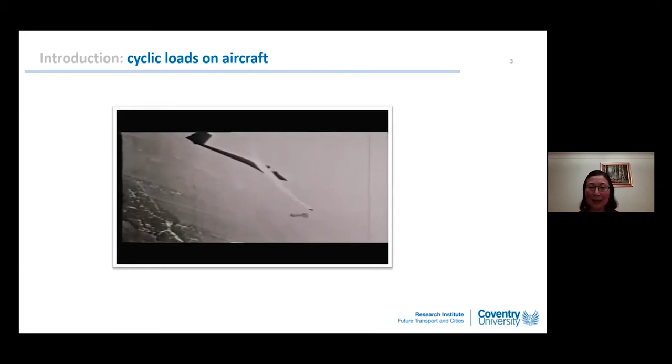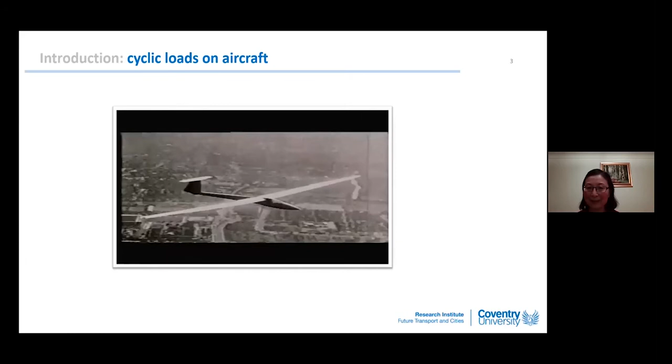First I want to show you a glider, which gives a graphic presentation of cyclic loads. I can't show this on large aircraft because they wouldn't have this kind of cyclic loading graphically. All I want to say is aircraft loads are cyclic, fluctuating.

In the air we have atmospheric turbulence load, with a frequency of about 0.5 to 1 Hertz cyclic loading. On the ground, we have taxi load before takeoff and after landing, which is also quite severe on the wing. In the fuselage, the cabin pressure load is 1 cycle per flight, but that is quite high because of the pressurization in the sky.

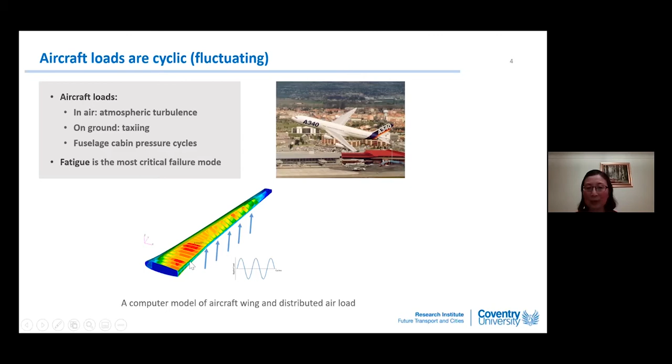Fatigue has been the most critical failure mode for airframes. The lower picture shows a wing model we did in finite element analysis, showing the air loads and their cyclic nature, with the hot spots tending to be in the wing root, since the wing is like a cantilever beam.

Why does metal respond to cyclic loads? Because metals are crystalline in nature, with atoms arranged in an ordered manner. Most structural metal materials are polycrystalline, consisting of a large number of individual grains or crystals arranged in an ordered manner. Dislocation will happen even under static tension load, moving along the crystallographic planes and causing the onset of slip.

What I'm showing is a slip band within the grain. That sliding causes the grain to move relative to the neighboring grain. This is true for both static load and cyclic load, but under cyclic load, the slip band progressively moves in a forward and reverse manner. Eventually we get extrusion and intrusion pairs, resulting in the formation of fatigue cracks - this is the famous Wood's model.

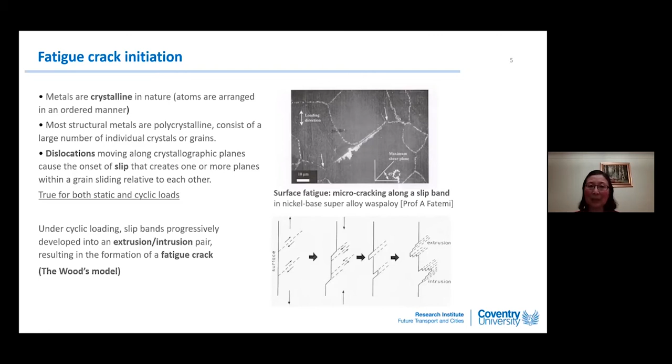So now we have cyclic loading and crack initiation in metals explained. The definition of metal fatigue has an official one in the ASTM standard, but that's very long for professional fatigue research. I quite like this one from Open University lecture notes, which says fatigue failure is the formation and propagation of cracks due to repetitive or cyclic load.

The second line is quite important - it says most fatigue failures are caused by cyclic loads significantly below the loads that would result in yielding of the material. That means even when loads are much lower than the yield strength, if applied cyclically, fatigue will happen.

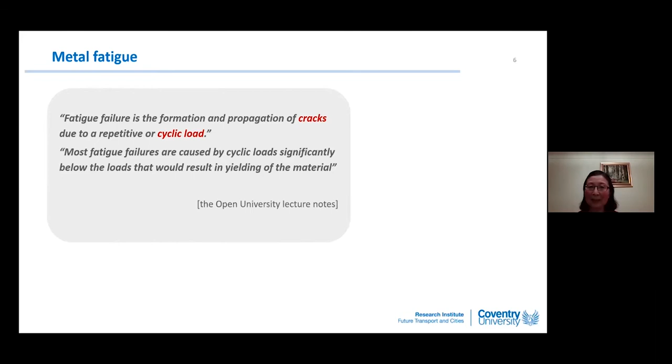The first person to study fatigue was Mr. Wohler in the 1850s - that's 170 years ago. He studied progressive failure in German railway axles and structures, and he invented the first fatigue test machine, shown here as a rotating bending machine. We have one in the faculty, but much more modern now.

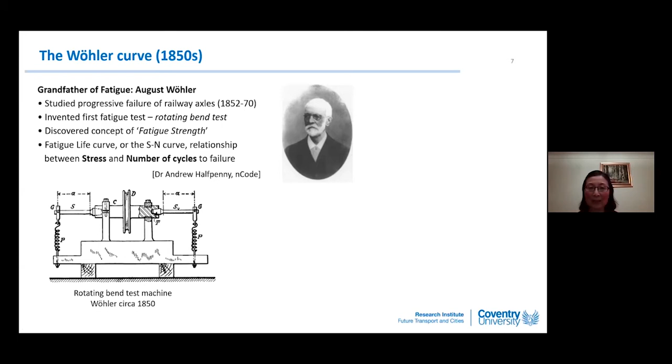Basically this axis bar was attached by two springs on the substrate base, applying bending moment, but the axis also rotates, so the bending moment introduced tension and compressive stress applied cyclically as it rotates. Wohler discovered the concept of fatigue strength for the first time in the world - even when stress is much lower than yield strength, metal will fatigue under cyclic load. I just want to show the Wohler curve.

The Wohler curve shows applied stress versus number of cycles to failure. These points were Wohler's original testing points, and you can see that as stress decreases, the fatigue life gets longer. That was his discovery, and he was the first person to correlate this relationship.

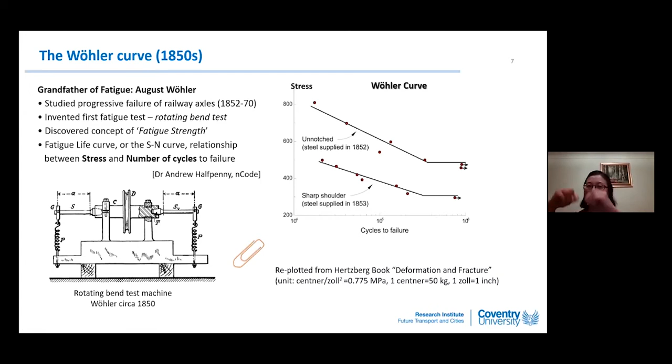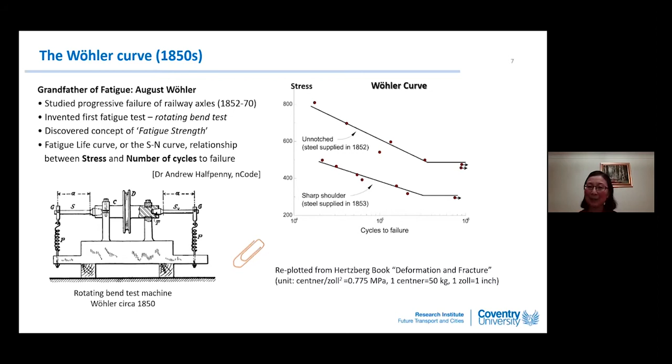So we don't have a fatigue machine, but I hope you have a paper clip, and you can actually extend this metal wire like this. I hope you can see. You can do the cyclic bending test in my class, and hopefully just before I finish the lecture, your metal wire will fail. If you only bend once, you would not fail statically because it's a ductile material.

But if you do it cyclically during my class, it will fail by fatigue. So the modern treatment of the Wohler curve, we call it the SN curve, where S stands for stress applied and N stands for number of cycles to failure. Some people still call it a Wohler curve.

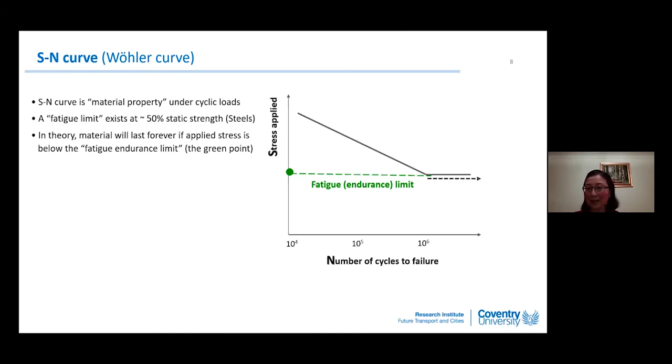That is true for steel alloys, for ferrous alloys. It really means if your applied stress is below the fatigue limit, there will be no fatigue - in theory your structure will last forever. However, lowering applied stress in engineering design often means an overly conservative design, and that leads to increased weight, increased fuel consumption, increased CO2, and increased cost of the parts.

Therefore, reducing stress is not always in the design envelope. The second thing I want to say is that in service, we don't really have a fatigue limit stress because service loads are variable - you could have bad weather, a big gust loading in the aircraft, or a heavy landing. So fatigue limit does not exist in real structures.

The final thing I would like to mention is stress raisers on a component - a large cutout, fastener holes, cracks, and joints with a geometry discontinuity. That is the one I would like to talk about today, stress raisers.

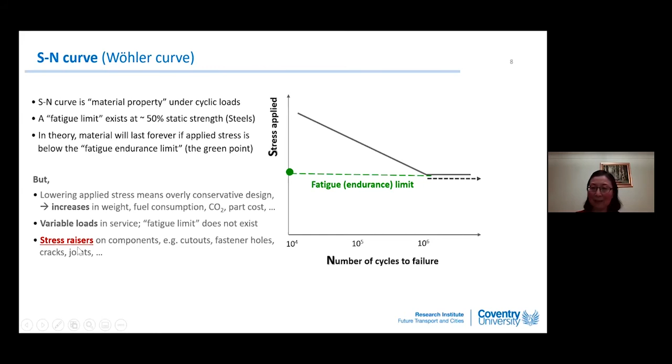The first example I want to discuss is the de Havilland Comet aircraft in 1952, which was the first jet passenger aircraft with a pressurized fuselage. It was very comfortable for people to travel with a pressurized fuselage and large square windows. But that was a mistake in design.

Two aircraft fell apart during mid-flight in 1954, and the reason was metal fatigue. The middle picture shows a section of the upper fuselage showing the fatigue crack around the corner of a square window. The crack propagated and eventually peeled the fuselage open, causing the aircraft's disintegration.

A finite element model shows a square window is a bad idea - you get stress concentration in the red hotspots at the four corners of the window. So when we fly these days, we notice our windows on aircraft are round or even oval-shaped, not square-shaped. This event changed the face of the commercial aircraft industry.

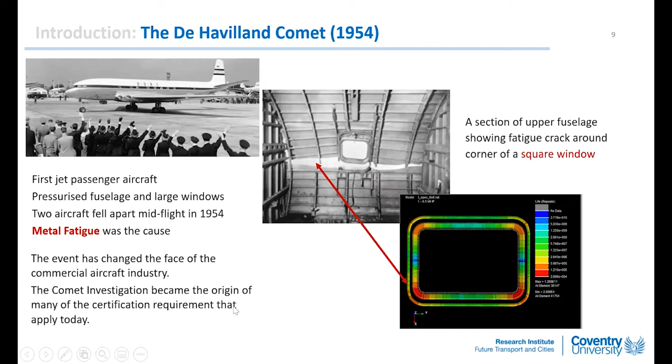Since the 1950s, the Comet investigation has become the origin of many certification requirements that still apply today. So after 34 years since the Comet accident, there was another accident with the operator Aloha, involving a Boeing 737 aircraft - 34 years after we designed against fatigue. But this time, the aircraft actually landed with one-third of the fuselage peeled open, killing one flight attendant.

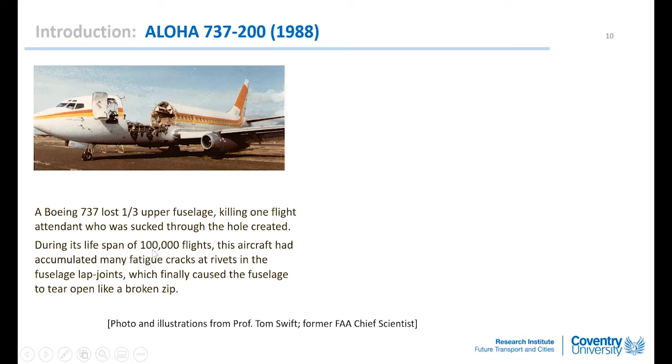The problem with this aircraft is the aging aircraft issue. Normally the aircraft design life is 40,000 flights, but this aircraft actually flew about 100,000 flights and had accumulated many, many small cracks.

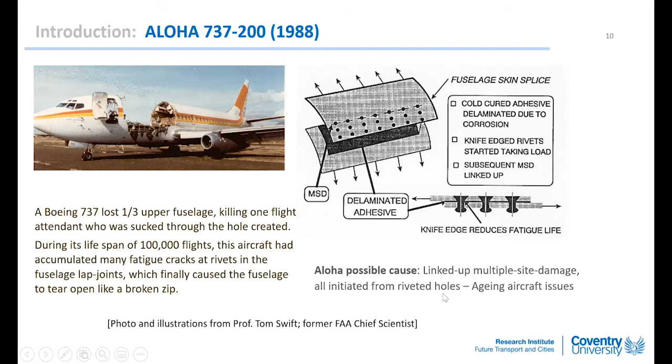The theory of the Aloha accident, from FAA chief scientist Professor Tom Swift's lecture, was the link-up of multiple site damage - an aging aircraft issue. So why do holes give us so much trouble? I want to explain this in part two of my lecture, on stress raisers.

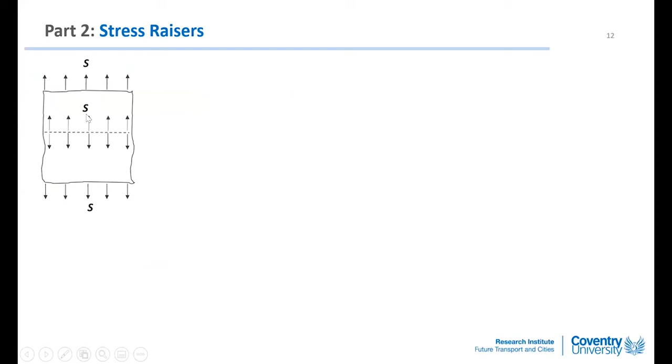If there's no stress raiser, no holes in the structure, whatever stress S you apply remotely, you get internally the same stress. As soon as you introduce an open hole, like a window cutout, the stress increases by 3 times. That's the classic solution, called a stress concentration factor, KT. By finite element or photoelasticity experimentation, the value for an open hole is about 3. So if you apply a stress of 100 megapascal, your local stress is 300 megapascal.

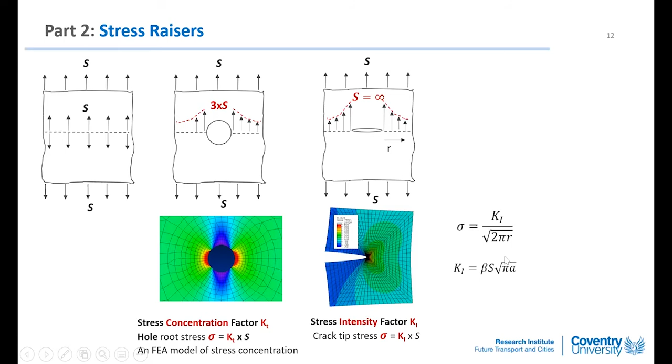But if we have cracks, for example if the aircraft has a scratch mark, a dent, or a sharp crack, the stress increase is even larger. That is solved by a fracture mechanics parameter called the stress intensity factor. That is not a stress concentration factor. It requires fracture mechanics equations, which I will return to later.

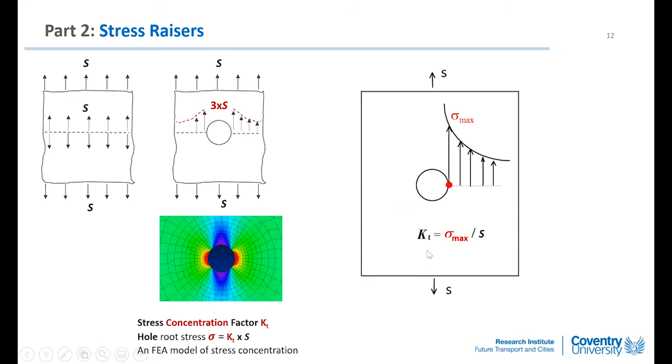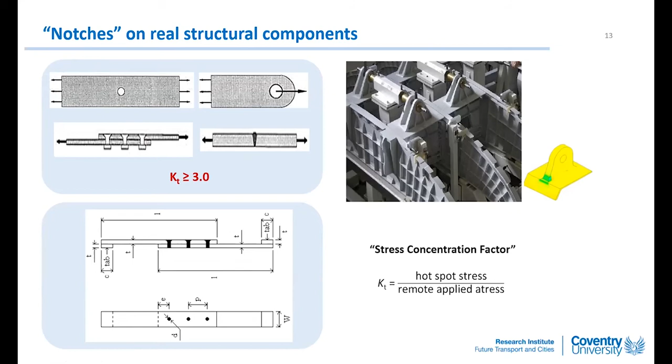For the moment I'll talk about holes. The hotspot stress, sigma max divided by applied stress, is the stress concentration factor. In my field we call this the notch effect. It doesn't matter whether it's an open hole, a pin-loaded hole, a riveted hole, or even a welded joint—we just call it notch effect. If you look in the dictionary, a notch is an indentation, a dent. So the notch does have an effect on structures because it creates a stress concentration.

Take an aircraft wing panel assembly. Traditionally these were made with thousands of titanium fasteners. This one was tested at Cranfield University with a simulated crack. Next time you're on a flight, look out the window at the wing and you'll see this pattern of riveted joints. This example is from an FAA lecture given at Cranfield 10 years ago, showing a real crack developed from fastener holes.

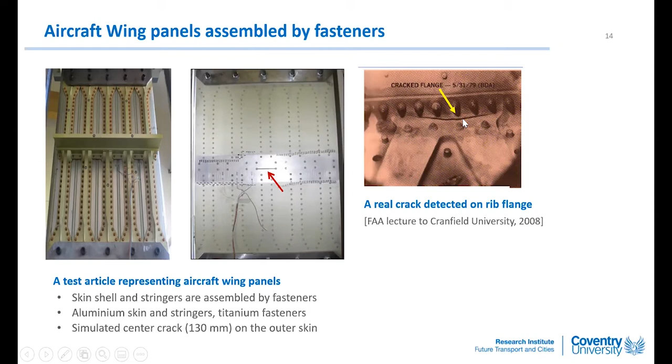So the notch effect on the S-N curve looks like this. Without any holes, your S-N curve is this black curve, tested using a smooth sample, like a dog bone or hourglass shape. The stress concentration factor is 1—there's no stress concentration, and this develops the material property. The S-N curve here is called a material property curve, with no geometric effect. As soon as you introduce a hole, you knock down the S-N curve by a factor of KT, the stress concentration factor.

So the S-N curve is much lower than the material curve. If you apply a stress shown by this dashed line on the material, you get a much longer life than you would get from the structure with the open hole—that's the orange line. So the stress riser actually reduces the material S-N curve by a factor of roughly KT.

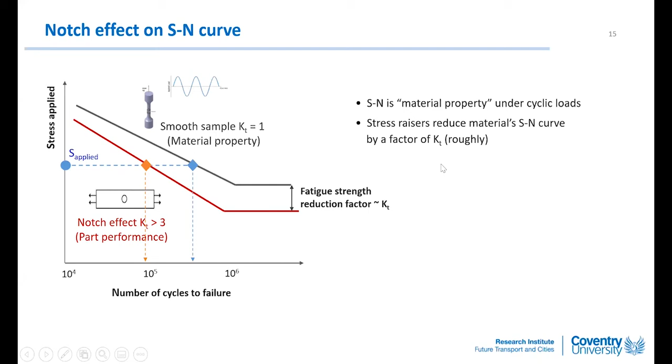After talking about holes, I want to cover one slide about cracks, since some of you will be dealing with crack growth, which requires fracture mechanics. There's another grandfather figure called Griffith, a British scientist working at the Royal Aircraft Establishment in the 1920s. His theory is based on the strain energy release rate. Griffith's theory says that if the strain energy release rate G, named after Griffith, is greater than the energy available to create a specific surface, then fracture will happen.

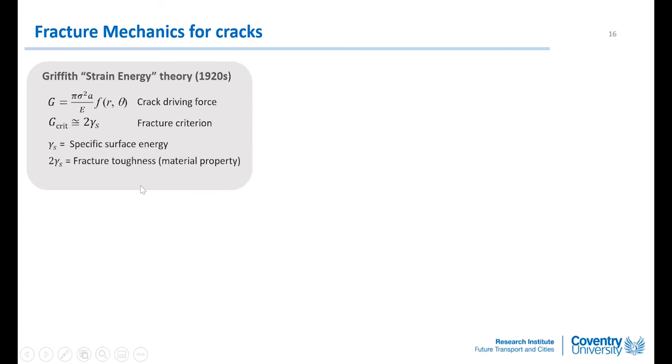In engineering there are three kinds of materials. First, brittle materials—very brittle—where the free surface energy is 2 times gamma S, which is the original Griffith theory. The easiest example of a brittle material is glass. If you have a scratch mark on glass, you can actually break it. No one wants to fly in a glass aircraft—it's very brittle and cannot tolerate even a tiny crack.

The middle category is ductile metal, like our aluminum, titanium, and steels. You get two beautiful plastic zones at the crack tip that absorb energy—this butterfly shape is the plasticity energy dissipation zone. This increases the fracture energy by a factor of gamma P, meaning plasticity, so the fracture toughness increases enormously. Ductile metal can tolerate crack growth.

The last material is laminated composites. You've got a 0-degree fiber layer, a 90-degree fiber next layer, and 45-degree fibers in further layers. In that case, it requires defining the fiber volume fraction and the matrix.

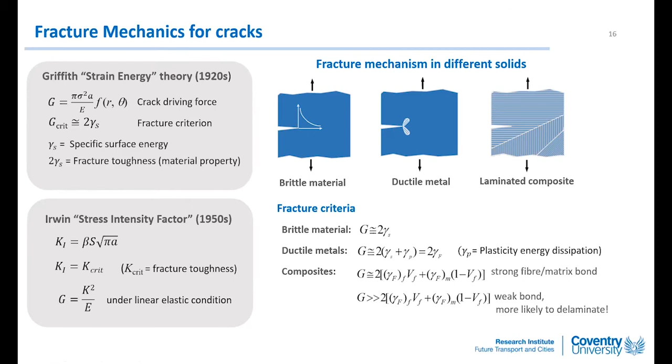So that concludes my part 2 about notches, round holes, and cracks. I just want to move to technologies development that can enhance our capability to design against fatigue. So I will talk about metallics first, and how we can reduce or even eliminate fasteners by advanced welding, integral machining, or large extrusions. The latest one is additive manufacturing, which can reduce part counts and cost.

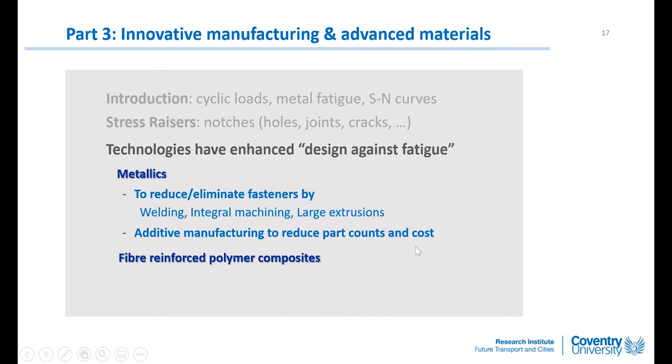So the metallic materials on this aircraft are dominated by aluminum alloys. 2000 series are very good for fatigue resistance, so they are used for making wings and fuselage shells. 7000 series are used for spar, stringers, and ribs because they are high strength and high stiffness.

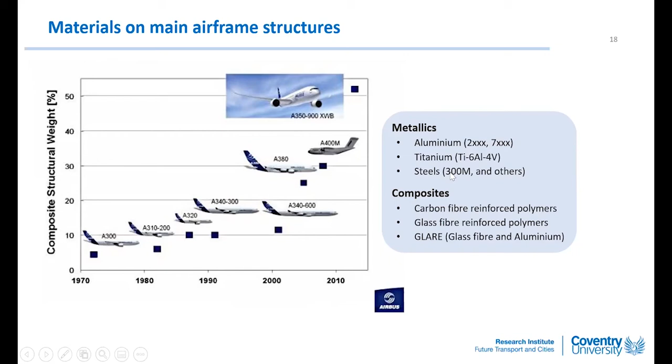We also have titanium alloys used for fittings and joints. Titanium alloy usage will increase as we introduce composites, because aluminum has a galvanic corrosion problem with carbon fiber. And finally, steels are very heavy and we are trying to avoid using steel, but this 300M steel is used on landing gear, and that carries the aircraft weight at landing. That is the highest strength steel currently we can have.

So talking about advanced welding for joining materials - about 20 years ago, in the millennium year, we had a project to replace these fasteners with a weld. This is a lap joint, so you have to use more material to make lap joints, and these fasteners currently are titanium fasteners, which are heavy. So the project was to use a butt weld here to join them, and that can save weight by about 0.8 kilograms per meter length of structure.

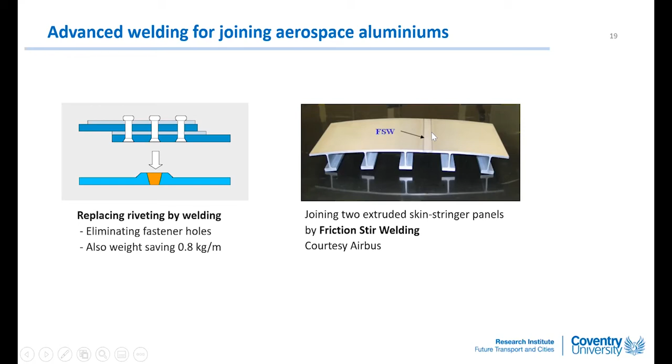The second example on the right is an Airbus project I worked on also about 15-20 years ago, to join two large extruded skin stringer panels. Each part has 3 stringers, joined by friction stir welding, which was invented by TWI in 1990 - that's 30 years ago - making it possible to join aerospace grade aluminum alloys.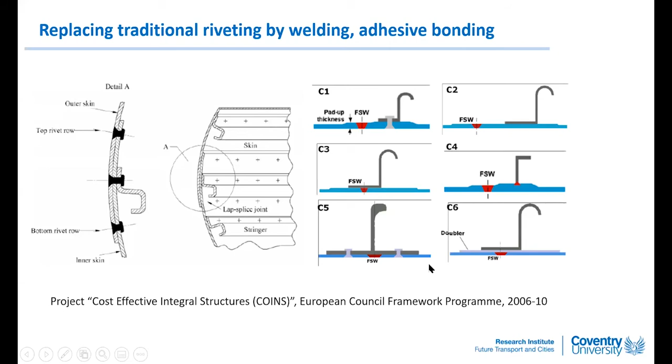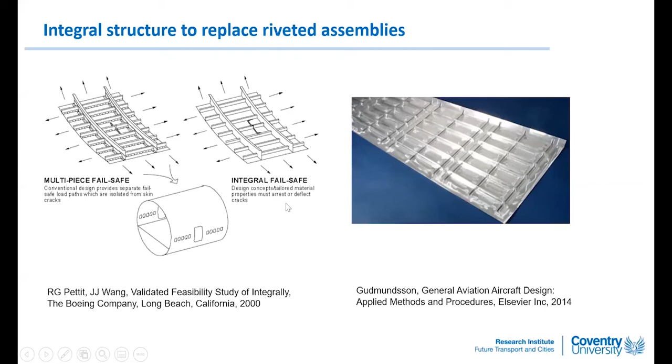The next example I want to show - at the same time, Boeing was studying this integral structure. The far left is a fastener assembly - you need about 10,000 of these fasteners on an aircraft - but on the right is integral machined structure. So the image is a bit like on the far right, without fasteners, to reduce weight.

The problem with this is that a crack will initiate somehow at the surface, and it will grow because we have load variations in service. We should also consider accidental damage like scratch marks or impact damage. So integral structure has a problem: the lack of crack arrest capability, because they don't have redundant members of structures. So damage introduced during service has to be tolerated. Therefore, we also need a damage tolerance design concept, and we also need structure health monitoring.

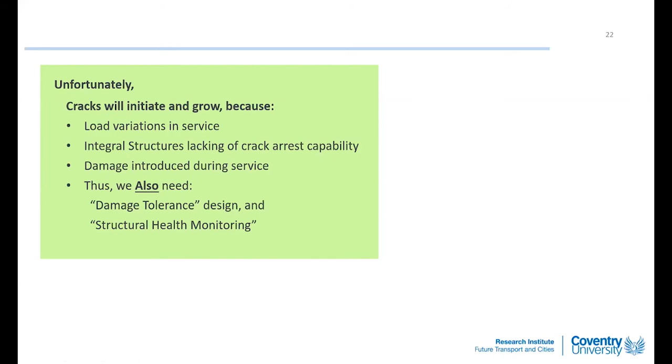I've never worked on structural health monitoring, but I'm going to talk about damage tolerance next. So the project we worked on with Professor Mike Fitzpatrick at Open University and myself at Cranfield, and Dr. Kada Said was also on this project, funded by the UK TSB Technology Strategy Board with Airbus, was to have bonded crack retarders on the structure.

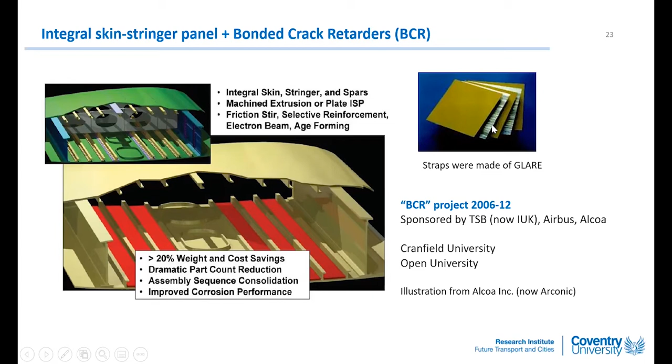The retarders are redundant members that will hopefully retard crack propagation. The retarder material was made of GLARE - aluminum with glass fiber laminate, a hybrid composite. The panel was made by Airbus, an integral panel with 5 crack retarders bonded in the middle. This was tested on the 1 meganewton test machine at Cranfield University.

The fatigue life results show this blue dotted line was without a strap - this was the baseline of the integral structure. The pink dots were testing data of one of the strapped panels, and you can see the crack retardation is quite significant.

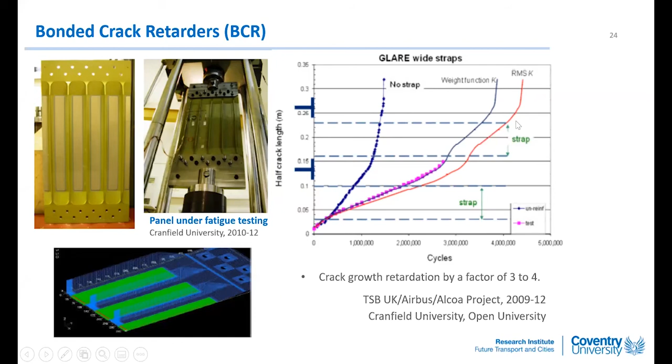We also did finite element modeling and fracture mechanics analysis, with 2 different calculations of the stress intensity factor, either by weight function or root mean square method, and we got some good predictions.

Finally, the reason we calculate crack length versus fatigue life is because we want to set an inspection regime for airline operators, so they will have a good time without inspection - that is the crack length before you need to do an inspection.

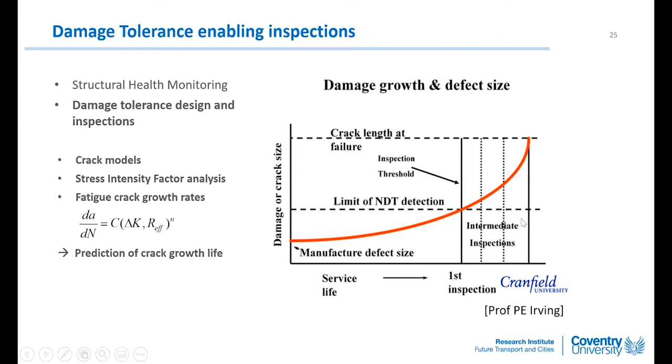And after the first inspection, they schedule intermediate inspections, like every 6 months, and that just makes sure any crack developed will be caught by inspections.

So to conclude my metal fatigue lecture, I just want to mention laser shock peening for life improvement. This is not my work - this is the work by Professor Mike Fitzpatrick, Dr. Niall Smyth, and PhD researcher Mitchell Leering at Coventry University. I have never done this, but I think it should be included in the modern technologies for design against fatigue. So what they did was use a laser to introduce a beneficial residual stress, in compression.

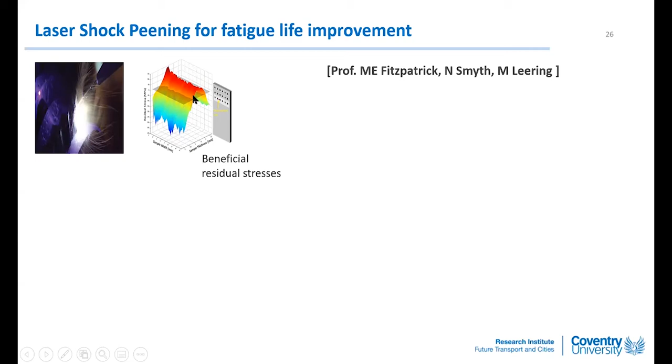So Mitchell, the PhD researcher, did some research. He tried different laser peening patterns at different angles in relation to the crack - the crack is horizontal, and the laser peening pattern is at different angles and distances. He calculated the stress intensity factor including the residual stress effect, so that's K total, meaning applied plus residual stress.

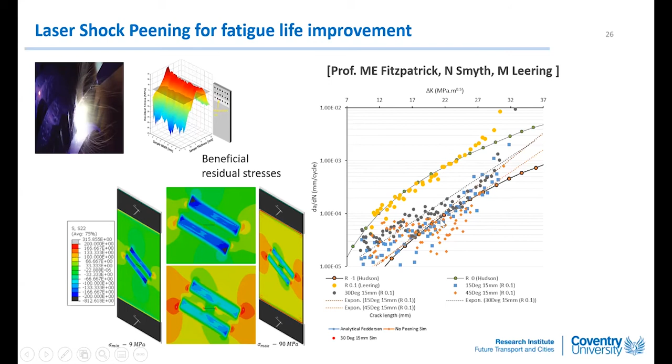The fatigue crack growth rate on the vertical axis measured against the crack driving force K looks like this. Without laser peening, you get these orange colored dots, but after laser peening, with 4 different patterns, you get a significant reduction in crack growth rate, meaning the crack fatigue life will be much longer. Remember, this is a log scale, so this gap is quite significant - about 1 or 2 orders of magnitude reduction in crack growth rate.

So my final 10 minutes - I still have 2 slides on additive manufacturing, then I'll move on to composites. Most people working on additive manufacturing focus on powder bed fusion.

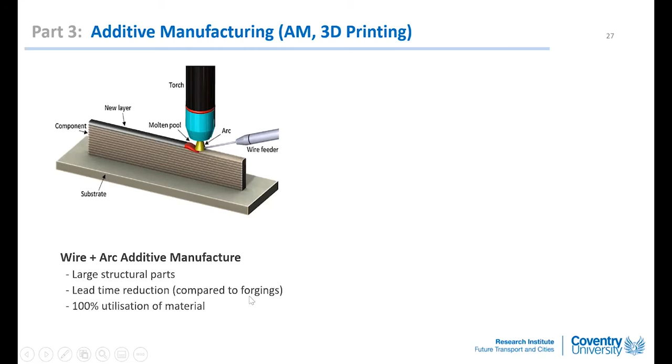I had the opportunity to work with Cranfield University on wire additive manufacturing. That's an old welding technique, welding 1 millimeter diameter wire layer by layer to form an additive made part. The advantage over powder bed is they can make a large part, the build time is faster than powder, and there's 100% utilization of material, so there's no wasted powder left unused after fusion.

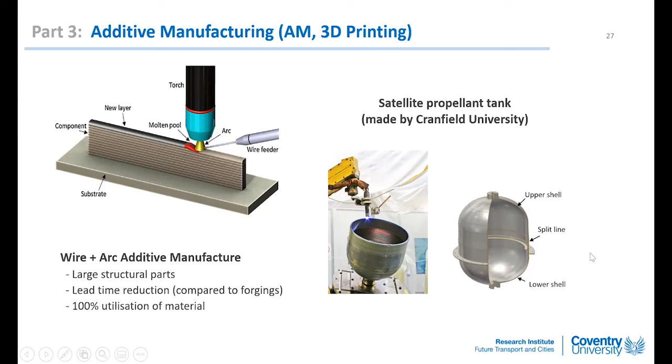The example was a satellite propellant tank made by Cranfield, now flying with the Airbus defense sector. Traditionally, if you want to make this tank by forging then machining off the interior to shape, it would take a few months. But with additive wire manufacturing, followed by polishing, it's a matter of weeks rather than months.

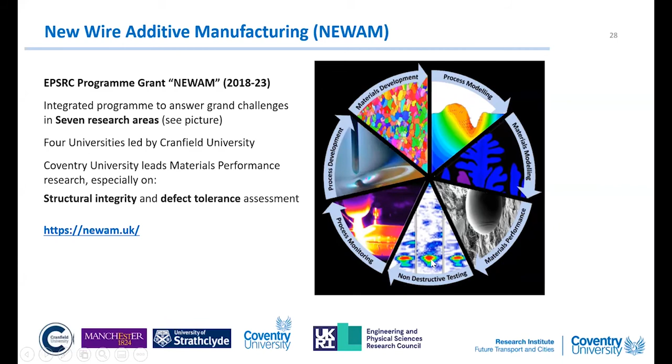In the last 2 years, EPSRC funded a program grant called New Wire Additive Manufacturing. We worked with 3 other universities on an integrated program to answer challenges in 7 research areas, from manufacturing to material science to process modeling. At Coventry, we lead the area called materials performance, which features what happens to fatigue life if there's a defect. We collaborated with Strathclyde University on non-destructive testing with ultrasound technology. PhD student Romali did this work.

Defects are a predominant failure source. We tested 2 types of defects. One is process inherent, which we can't avoid—this is gas porosity with diameter smaller than 100 micrometers. The other type is anomaly defects, which have a diameter greater than 100 micrometers. We introduced these by contaminated feedstock, which is also a reality. Two micrographs show the inherent defects and the anomaly ones.

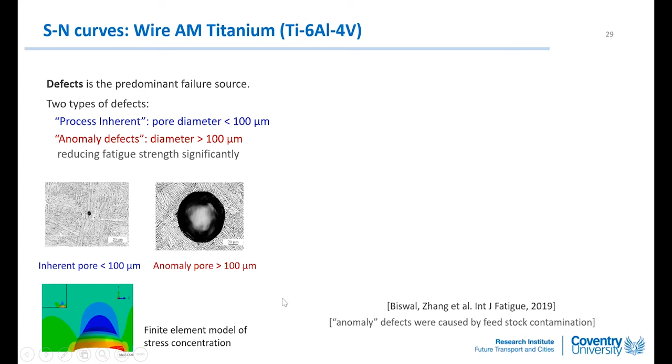Romali also did a stress analysis by finite element, showing that at the porosity hot spot in red, the stress concentration factor is about 2. The S-N curve, applied stress versus cycles to failure, shows the blue group is either without porosity—solid blue line—or with some inherent small porosity—dashed line. That really means we can live with this. This is process inherent and we can't avoid it; we can design to tolerate it. But the red, anomaly ones reduce the fatigue life by a factor of 2.

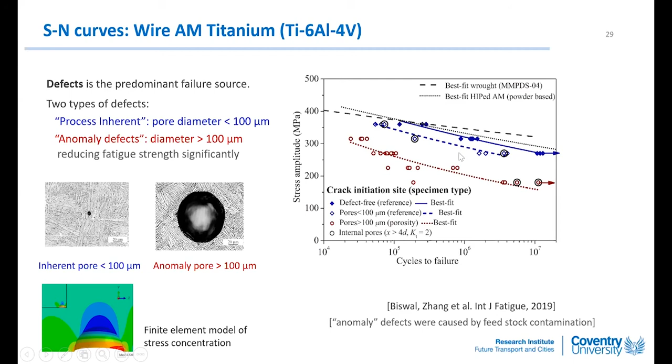That concludes my metallic fatigue talk. Quick summary: all notches act as stress raisers, and metallic materials are highly sensitive to stress concentration effects. Material property is represented by the S-N curve. After 170 years, we still use the S-N curve.

Advanced manufacturing in welding, large extrusion, adhesive bonding, and additive manufacturing can all create a more efficient airframe—called integral metallic structures. We have far fewer fasteners, maybe no stress concentration in the future, and light weighting because there are no fasteners, also low cost with no joint effort. The limitation currently is that integral structures have no crack arrest capability because they have no redundancy members.

With additive manufacturing, people really worry about defects. Also, inhomogeneous microstructure—I have not talked about this today. Some of these issues have been addressed by damage tolerance.

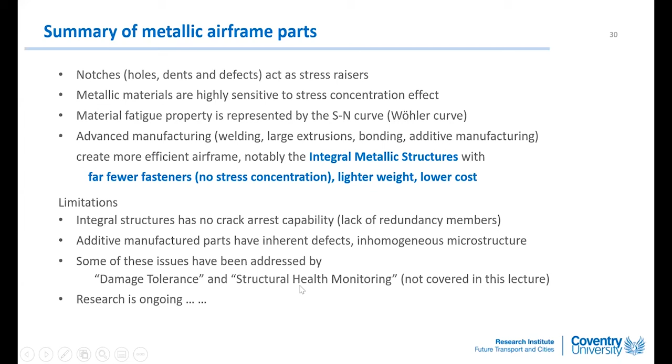Structure health monitoring is a big thing. I have not worked on this, so I have not talked about it.

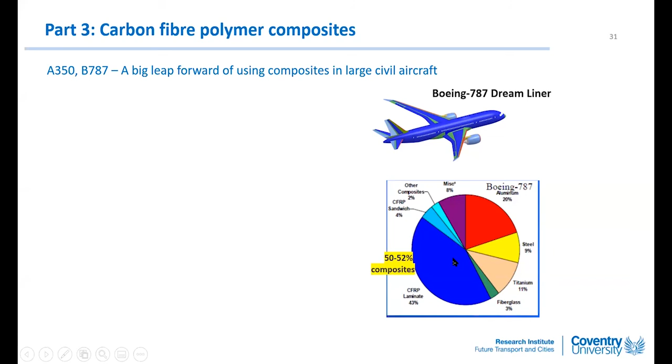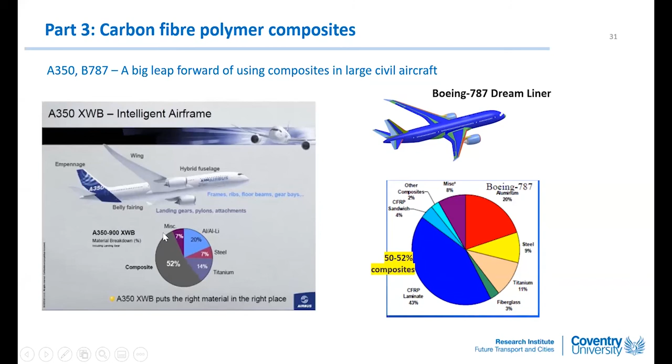In my last 5 or 7 minutes, I will talk about composite aircraft, just in case you're interested. The Boeing Dreamliner 787 has 50% composites in this dark blue area. Airbus responded with the A350 extra wide body aircraft, which again is 52% carbon fiber epoxy composites.

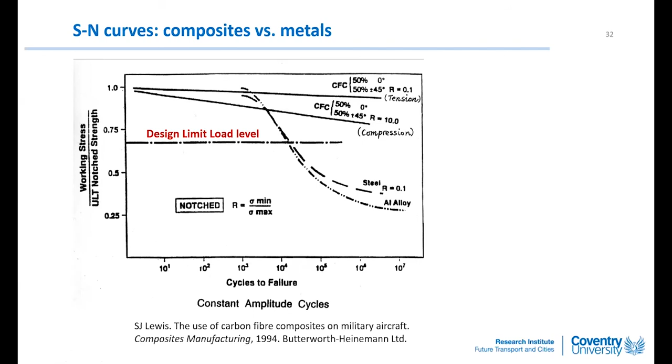So really, composites do not have a fatigue problem. They are above the fatigue limit. The reason for this is that epoxy resin has no plastic slip line, so they don't have dislocation or cyclic slip like metal. Carbon fiber epoxy laminate does not fail due to fatigue. The S-N curve, again from this book, is also flat—I just want to convince you. So the fatigue performance is much, much more superior to metals.

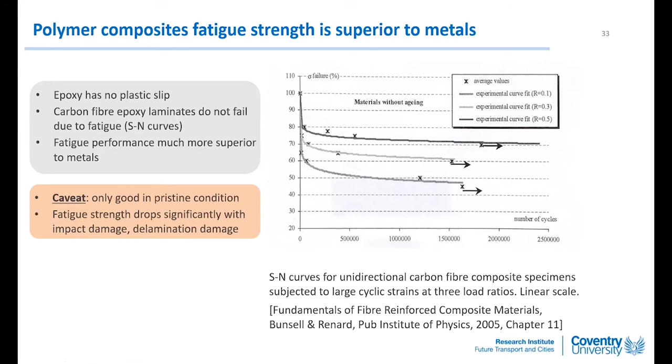However, there is a caveat: only if composites are in good condition, in pristine condition. Fatigue strength will drop significantly if we have impact damage, delamination, or if the manufacturer has imperfections in the laminate—called manufacturing defects. That has been my research for the last 30 years.

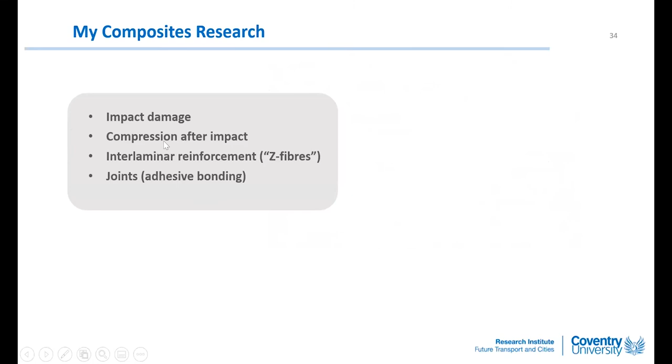From Imperial College to Cranfield to Coventry, I've been working on impact damage, composite compression after impact, and the joint.

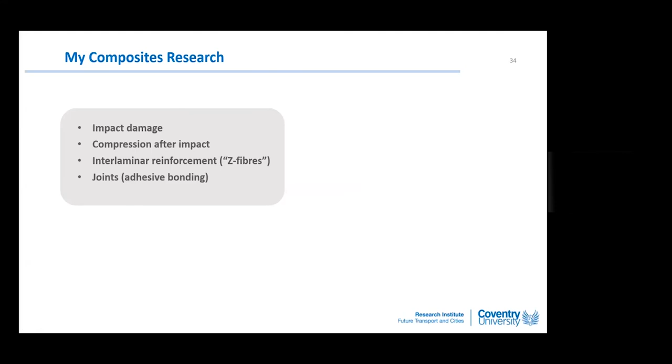So I have 4 slides. I will finish very quickly. I think this one is quite important.

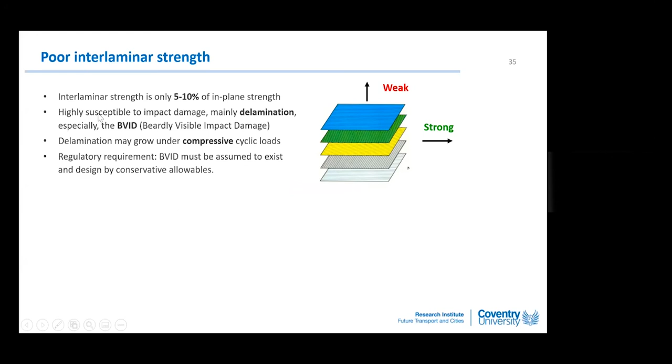Composites have very poor interlaminar strength, about 5 to 10% of the in-plane strength. Horizontally they are very strong, impossible to fail, but vertically easy to peel, like peeling a banana skin - the strength is very low. So they're highly susceptible to impact damage.

So I did about 400 tests in my postdoc time. When you do the impact, you drop a hammer and you can see the delamination in the middle. The worst thing is it's barely visible - inspectors can't see it.

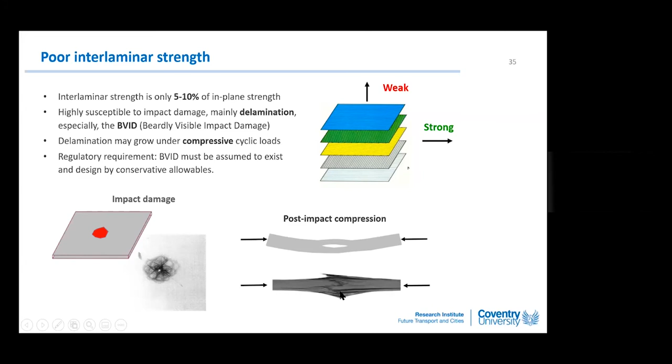So after impact, tension doesn't matter, but compression is very critical because the delamination will open up. We did a lot of testing. The real issue is the delamination is like cracks in metal - that's the main message. If you apply compression, delamination will open.

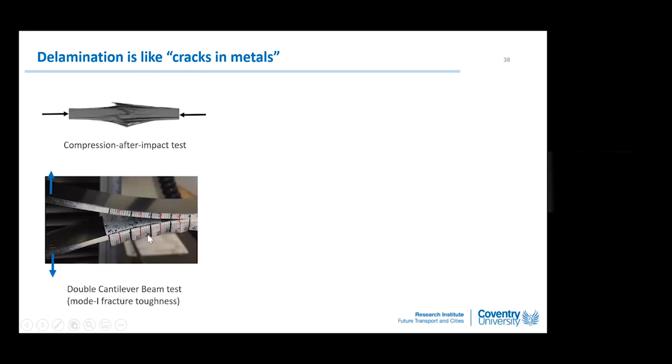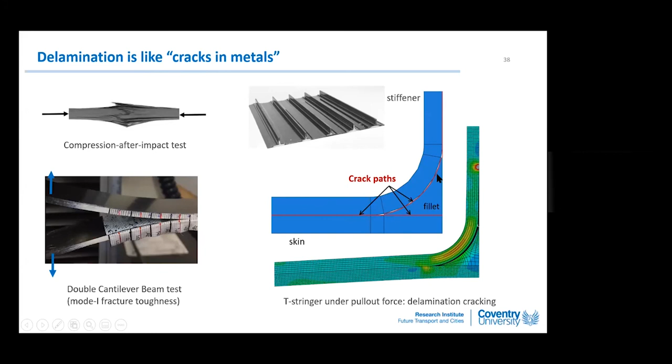In the laboratory, we test them in the double cantilever beam to measure the fracture toughness value. We also did a lot of modeling work with my PhD student on the stringers with cracks in the joint area.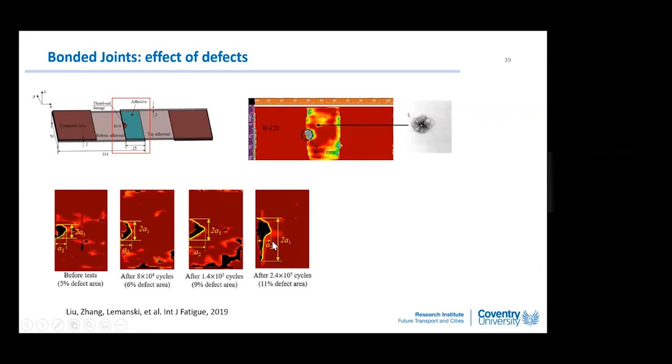The final slides just say the bonded joint is also not safe. The bonding line can have defects or even impact damage - that is a runway stone hitting the aircraft, or people dropping hammers. Impact has to be tolerated. So we actually use ultrasound to monitor these defects in fatigue loading until they become quite large after some 10,000, 100,000 cycles.

To conclude my lecture, I just want to say all structural materials are highly sensitive to stress concentration. For metals, these are the holes, dents, pits, and defects. The Wohler curve, after 170 years, is still the design curve against fatigue. But if you have cracks, you use fracture mechanics.

In composites, delamination is always the issue, so we use fracture mechanics to design.

A quick outlook for the future: both metal and composites have their place in current aerostructures. Metals are moving toward more integral, lightweight structures using modern technologies. For composites, damage tolerance capability is key, and structural health monitoring is the big thing currently.

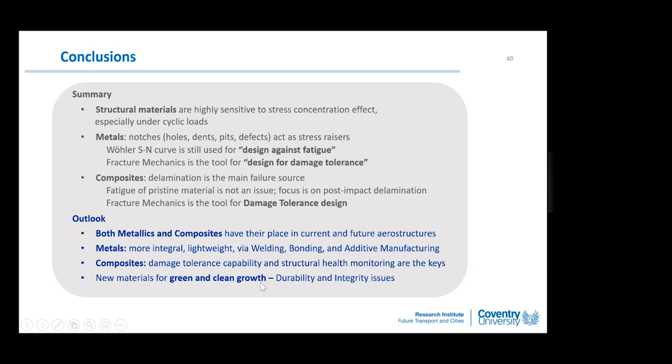Finally, I want to say my group really wants to embrace the green and clean growth agenda by being part of it, doing a good job on damage tolerance analysis of any new materials.